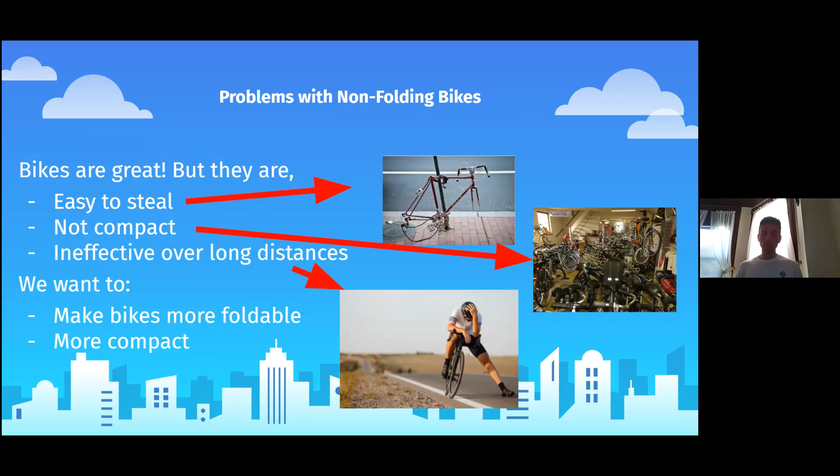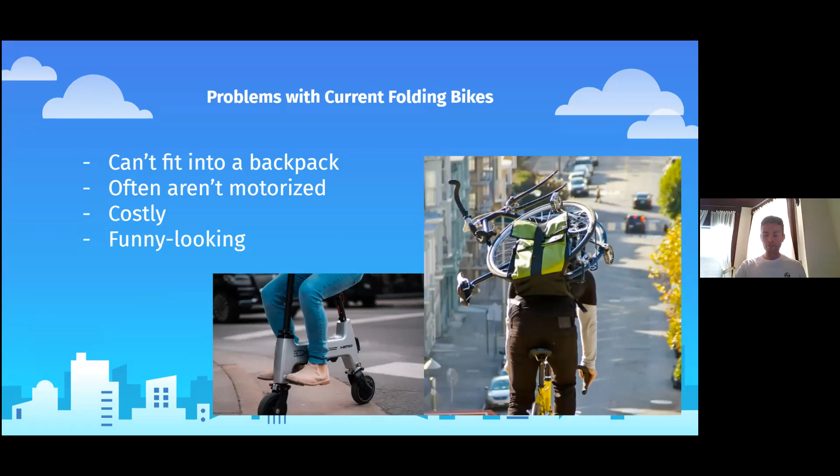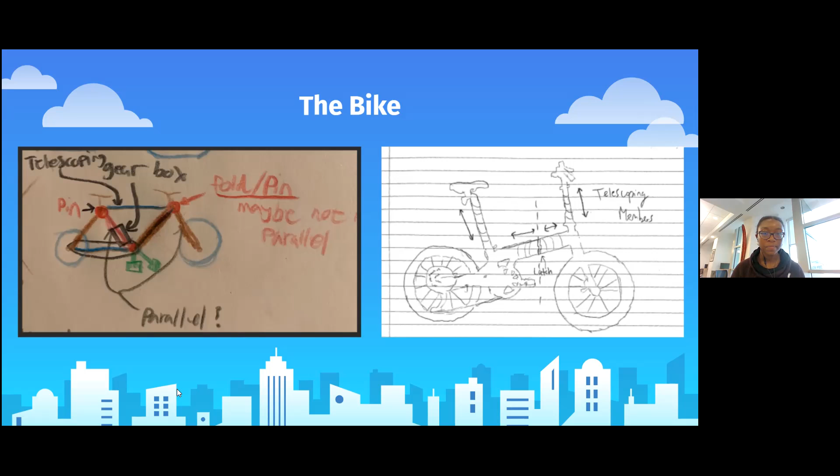So starting out with an outline of our frame, basically the function of the frame would be to hold all of the components in place as you would expect a standard bike frame to. The differences with this are that it would be able to fold and telescope on itself, which would minimize the stowage profile of the bike.

The segments in compression would be solid and would fold in at a hinge, whereas the segments that are in tension would be the telescoping members that would basically telescope in on themselves.

For the design specs, we wanted it to be able to support a standard sized adult. So we went with around 250 pound maximum load with a collapsing size to be able to fit into a 64-liter backpack. We wanted it to be able to fold very quickly, and the maximum speed we wanted was around 45 miles per hour when you pedal with the motor assist.

And the materials we found, given these design specs and our calculations, we decided on aluminum 6061 because it's lightweight, it is cheap to use, and it would be strong enough to meet these needs.

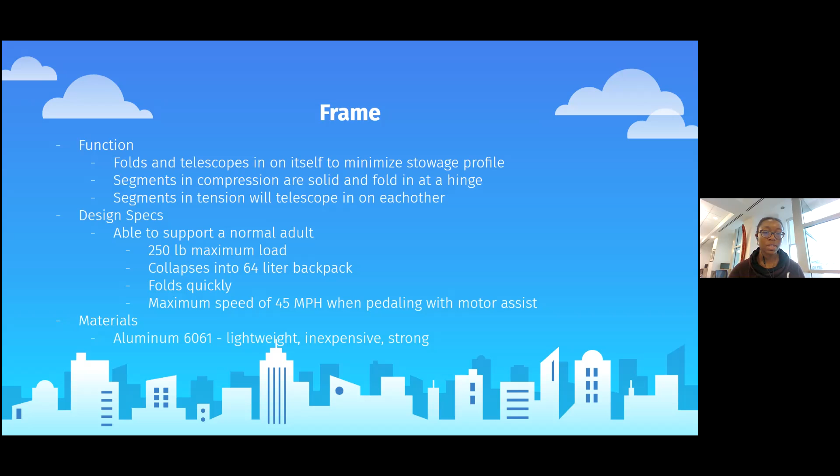Next, with our telescoping members, these again would function to basically be able to telescope in on itself and compact into a small profile. Each member of the telescope would basically be a conically flared hollow cylinder that can nest inside itself, and the pins would be used to basically prevent any rotational motion at each joint.

For the design specs for this, we wanted it to be able to withstand a maximum failure load of around 124 to 290 megapascals. And to do this, we needed a sufficient strength to weight ratio, as well as an overall weight of the bike of less than 40 pounds.

So the material, once again, we chose was 6061 based on these design specs and our calculations. And the user experience, in order for this to function in real life, would be a single twist pin that would collapse each member.

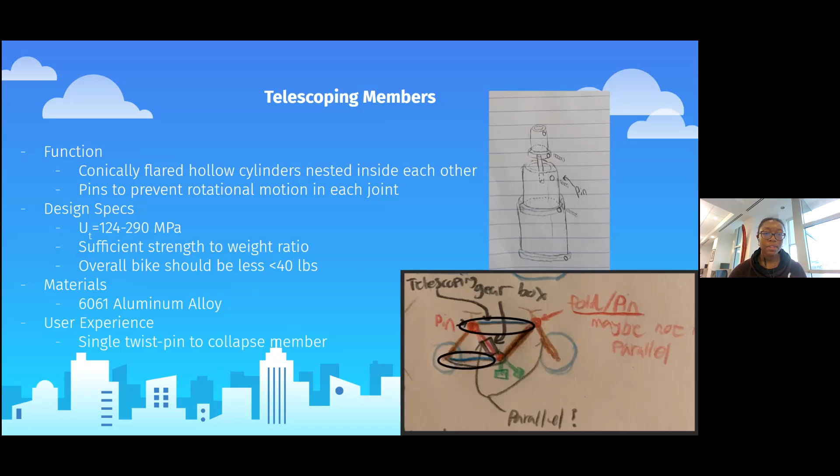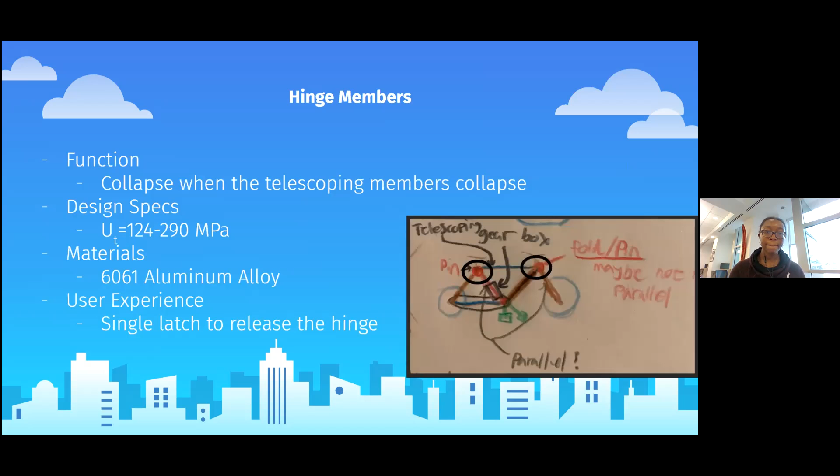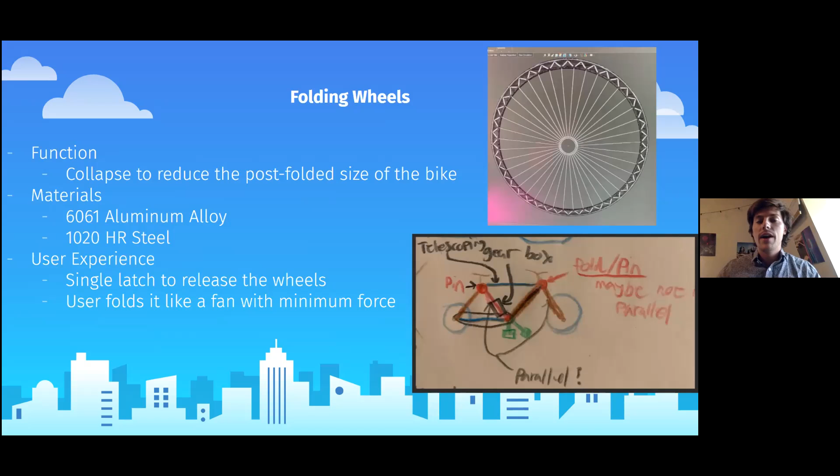But the smaller aspects in the wheel have to be made of 1020 HR steel to be strong enough and to have an infinite fatigue life, as they'll be undergoing a lot of cyclic loading. Like the other members, a single latch is used to release the entire wheel, and then the user can fold it like a fan with very minimum force. Next slide.

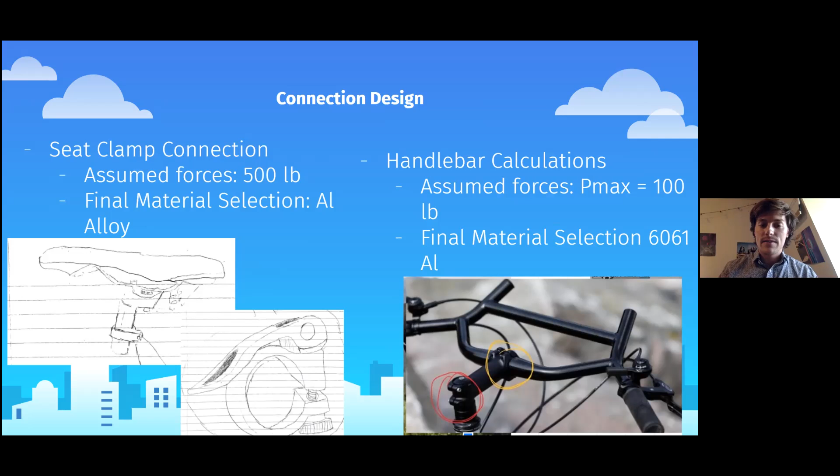So the clamp is just a screw in there, as you can see in the middle picture, that a user can really easily screw in and latch, and their bike seat will not fall in. We also assumed a maximum force of 100 pounds for the handlebar, although that's more than there would actually be. It'd likely be even less than that. And we also looked at 6061 aluminum there.

Okay. For our powertrain, we wanted to have a capability of a 2 meters per second acceleration, and that would get a total of a 25 kilometers per hour maximum speed in order to meet the requirements for usability for the customers. The motor and gear train would have a size of 11 by 6 centimeters in order to be small enough to fit inside of a folding bike.

For our gear train, we're planning on having a set of 2 planetary gearboxes in series. Each set of gears would have a 6.24 ratio, and the ratio from the sprocket the gearbox attaches to on the pedals to the sprocket on the wheels has a 2.15 ratio, for a total of an 83.85 or 84 gear ratio between the motor and the wheels in order to get enough torque for our acceleration.

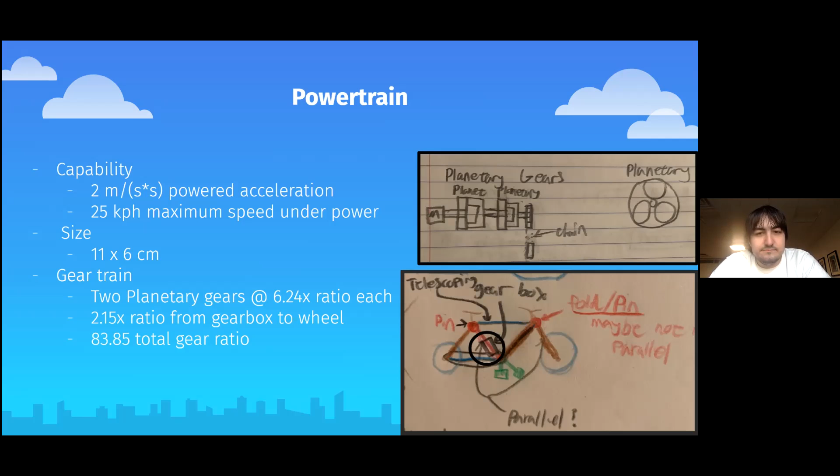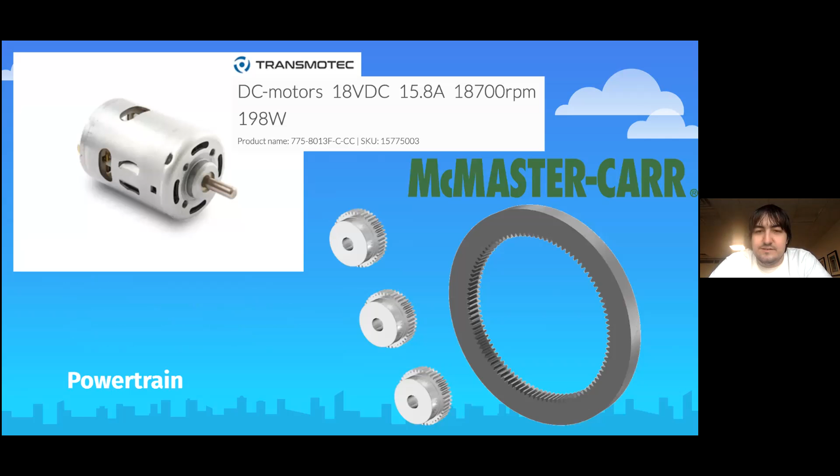Here's a selection of the motors and gears that we were looking at for our gear train, as well as we've done AGMA calculations on these gears, and the stress is much less than the strength of the steel that McMaster-Carr uses for their gears.

So, a summary of all the improvements we've made. The bike will be small enough to fold into a large backpack, so it has much more practical portability than a lot of other bikes. It's a relatively high power motor for acceleration and top speed. It will take at most 2 minutes to collapse. There are only a few actual folding mechanisms, and with our single twist pin, they'll be simple and quick to put away. We also believe there'll be a reasonable cost of under $1,000 for a full production version of this bike.

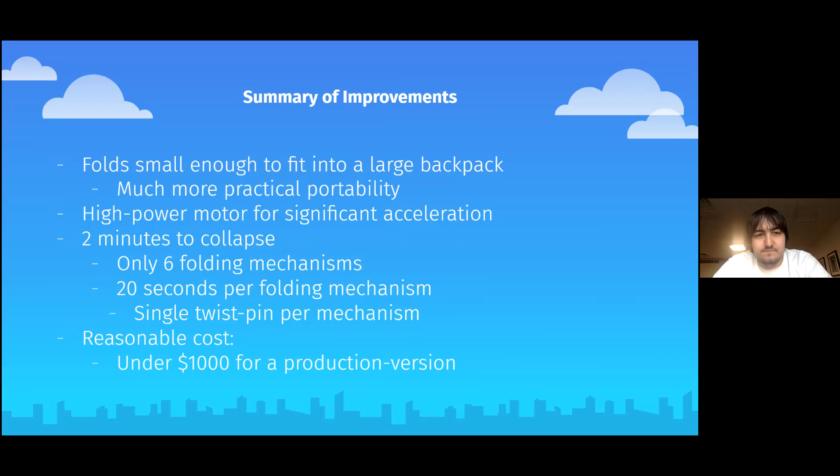In conclusion, working on this bike, we've learned a lot doing it, and it's been a very engaging and challenging experience, but also we've had a lot of fun. And so if we were to take this to the next steps, that would be finalizing the design and then looking at manufacturers for all of the parts we designed.